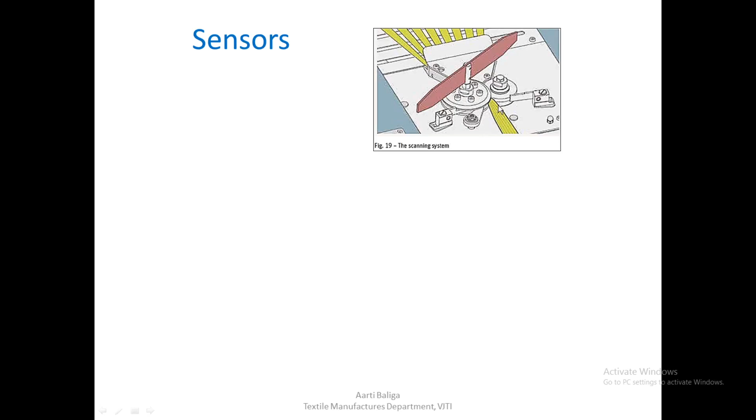So let us first see what kind of sensors are available to measure the thickness of the sliver, whether it is at an input level or at the output level. What you see here in the sketch is the tongue and groove type, the mechanical type of sensor scanning system. So we shall see what kind of sensors are available.

The sensors must be strong and the sensing capacity must not change with changes in temperature and humidity. So any kind of atmospheric changes, whether temperature or humidity, should not affect the sensing capacity of any sensors that we may choose to install on our draw frame.

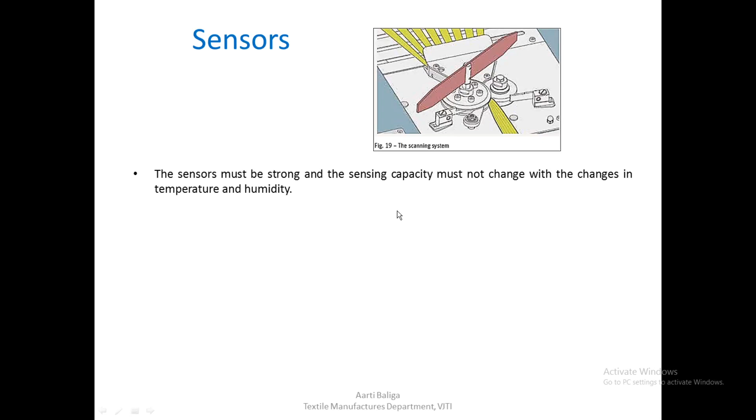Care must be taken so that fiber fly and dust do not affect the sensing capability of sensors. We know that a lot of fly and dust is generated on a draw frame, and if by chance some of it gets deposited on the sensor, the sensor should be robust enough to handle the accumulation of fly and dust, and it should not change the sensing capability too much. Therefore, performance, reliability, and long-term stability of the sensor is very important.

The detection is carried out mechanically by the up and down movement of a grooved roller. This movement is measured, and that is converted into an electrical signal, which will tell us the thickness of the sliver.

There is another way of measuring this thickness, and that is by capacitive sensors. Here the change in capacitance is actually an indicator of the mass variation in a sliver.

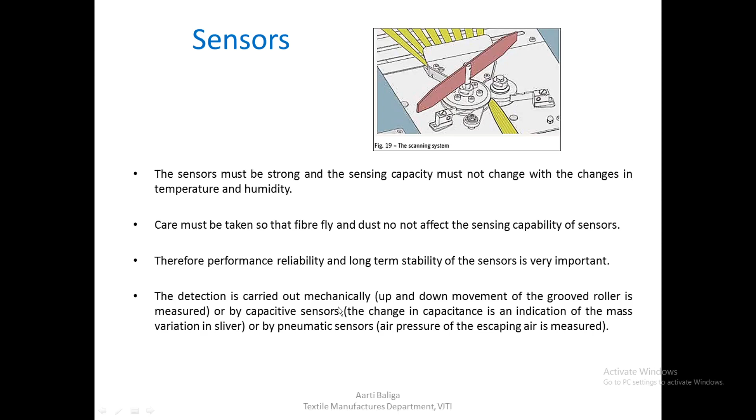And there is a third type of sensor, that is a pneumatic sensor, which depends on air pressure. When the air escapes the material, when the material is compressed, the escaping air variation in force is measured, and that is converted into an electrical signal to tell us the thickness of the material.

So whatever the type of sensor we may choose to have, let us see the location of the sensor on a draw frame. In case of an open loop auto leveler, which we have seen earlier, that is able to correct short and medium term variation. So in an open loop auto leveler, the sensor is always going to be before the process.

That means it is going to be before the drafting system. So in this diagram, we see these are the input slivers that are there. This is the auto leveling principle of an RSB D40, which is a draw frame by Rieter. Looking at this, we see there is an input of 6 slivers that is shown here, and number one marked here is the scanning discs, which are going to do the sensing or measuring of the input material.

Then 2 is the digital signal processor. Whatever signal is generated by this scanning disc in terms of mechanical movement is converted into electrical signal by this digital signal processor, and then it is passed on to one AC servo drive, which handles the speed, or rather gives the command to the drafting system. Specifically, it is shown here as number 4, which is the middle roller of a 4-over-3 drafting arrangement. 5 here is the main motor, and 6 here is the Rieter quality monitor, RQM, which is marked here, which we will probably see in the next lecture.

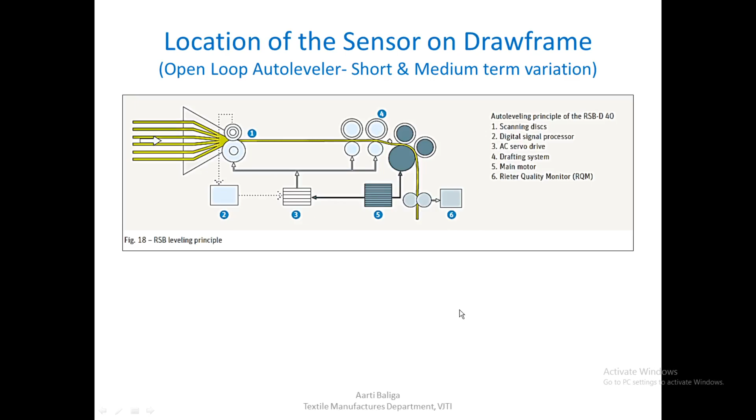So the scanning disc 1 measures the mass deviation of the infeed sliver, and the signal is forwarded to the bottom middle roller of the drafting system, which is marked 4. This bottom roller gets the signal exactly when the scanned piece of faulty sliver arrives at the drafting point in the main zone.

Till the time that material is still traveling towards the middle pair of rollers, the signal is stored in a storage device, and then as soon as it's the right time, when the material just reaches this particular roller, the signal changes the speed of the middle roller to adjust the draft in the direction that the scanning roller has measured.

So it can either work in the way of increasing the draft or decreasing the draft, depending on what kind of material it has measured.

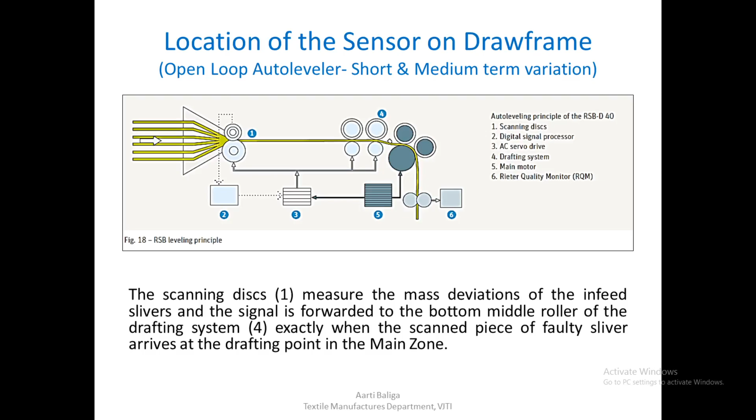So now after understanding the location of the sensor on draw frame, let us see the scanning roller a little bit in more detail. The mechanical type comes in two types again: smooth sensing roller and grooved sensing roller.

This one doesn't have an edge on both sides, whereas this roller can go into the particular slot of the other roller. What you see here is the sliver in between the two rollers. If there is a thick place, this is spring loaded - one of the rollers is spring loaded, so it will be pushed upwards if there is a thick sliver coming in. If it is thin, it will be pushed downwards. This mechanical movement of the top roller up and down is measured and converted into an electric signal.

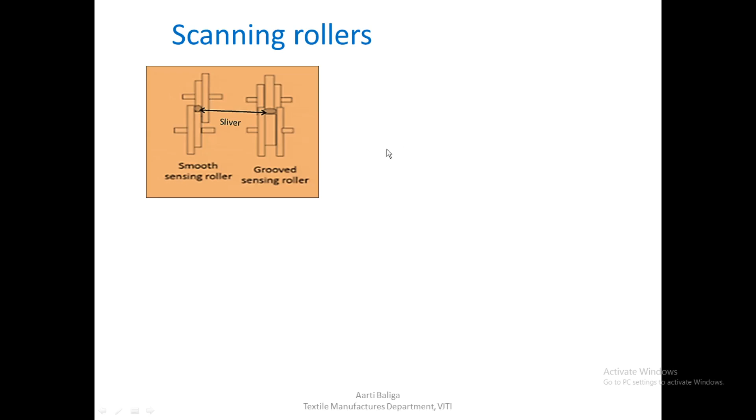The combined thickness of the infeed sliver is continuously measured by a pair of scanning rollers, and they look like this on Rieter, and on Trutzschler it looks like this. You can see the groove roller, and this is known as a tongue and groove roller. Here, somewhere in this width, the sliver will be passing.

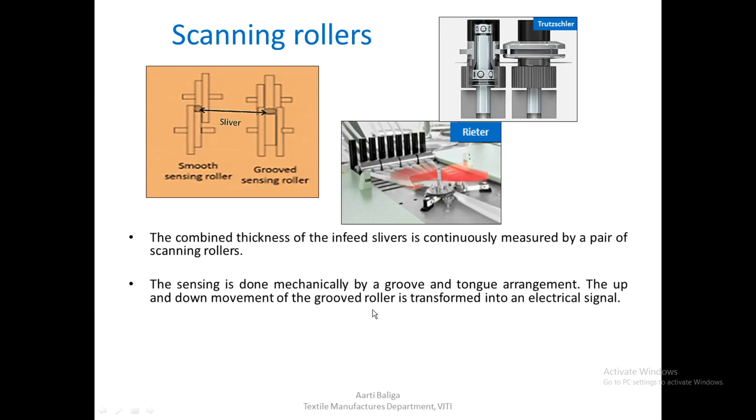The sensing is done mechanically by a groove and tongue arrangement. The up and down movement of the groove roller is transformed into an electrical signal. The width has to be adjusted depending on the bulk of the fed slivers. It ranges from 3 to 10 mm.

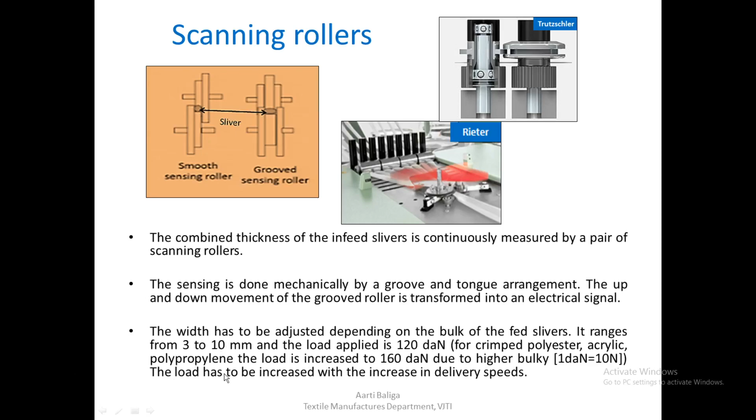As we saw, we need to apply a load to keep the rollers in contact with each other. So the load applied is around 120 daN for crimped polyester, acrylic, polypropylene, and the load is 160 due to the higher bulky material that we see. The load has to be increased with the increase in delivery speeds.

Location of the sensor on the draw frame for closed loop auto leveler, medium and long term variation. Suppose instead of an open loop auto leveler, I prefer to use a closed loop auto leveler. This is not seen on modern draw frames now, but if we were to apply a closed loop auto leveler, we would be having that on the delivery side of the machine, and we are going to see exactly where it would be installed.

It would be installed near the trumpet, after the front roller, before the calendar roller, and this would be the measuring point or the sensing point. As you can see, this is the passage of material - material comes out of the front roller, goes into the measuring trumpet, then into the calendar roller. So the measuring trumpet is the one which is going to sense the material.

Now the controlling point is the middle roller as before. After it senses, it will send the signal to the middle roller for any kind of adjustment and changes. So adjustment takes place by adjusting the draft in the main drafting zone.

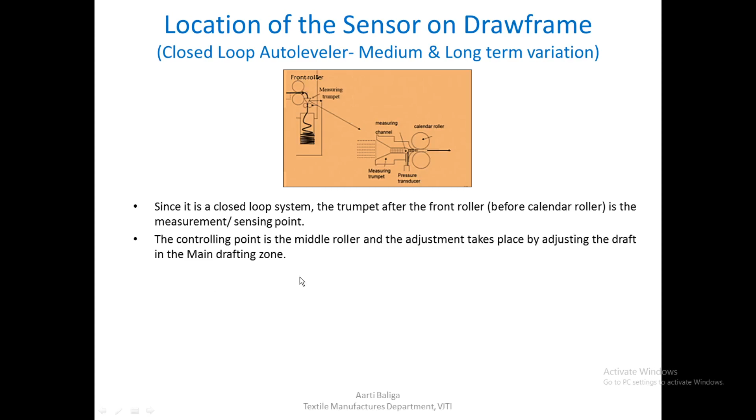Since the measurement has to be carried out at a very high speed, because it's the delivery side that we're talking about, measurement will be carried out at a very high speed. So no mechanical measuring system is used. A pressure transducer at the trumpet records the variation.

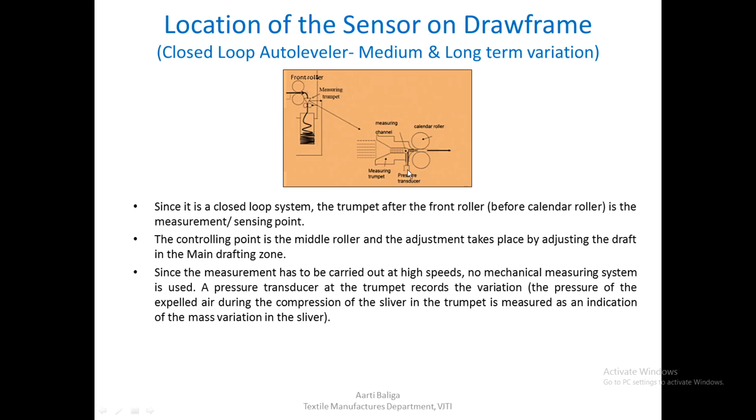The pressure of the expelled air, as I said earlier, because of the compression of the sliver at the trumpet, that particular air is measured, and this is an indication of the mass variation in the sliver. It is recorded by this pressure transducer and it is converted into appropriate signals for the middle roller to change its speed.

The device is simple in construction and needs minimum maintenance since there are no moving parts, but the measurement is affected by the variation in fiber fineness.

Such measurements, which depend on air passing through a tuft of fibers, will always affect the amount of air passing through, and it will always depend on the fiber fineness. The amount of air going through this tuft of fibers will change if the fiber is finer, or if the fiber is coarser. So depending on the fineness of the fiber, this will change. Although this device is simple in construction, this variation will affect the measurement - it will always depend on the fiber fineness.

Since the amount of air that escapes through the fiber mass changes with the changes in fiber fineness, we also see this in fineness measuring instruments, where various fiber fineness measurements again use air - the principle of airflow is used to measure fiber fineness. The same thing will happen here: the moment the fiber fineness changes, you will have a variation in the amount of air passing through, and you will have a variation.

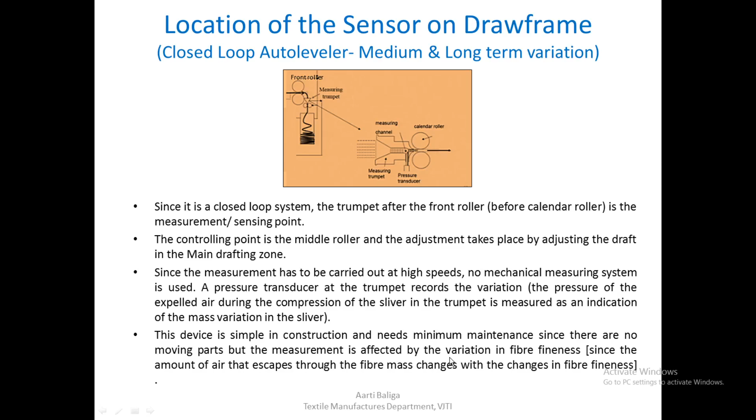So we come to a main topic, an important one, that is correction length. Let us see what is correction length.

As soon as the sensing device detects a deviation in mass, a signal is sent to the regulating device. But the correction happens gradually due to the inherent inertia of the system. So between the measurement and the regulating, there is some time delay. This happens mainly because it takes time for the system to measure and then go and regulate, and by the time it regulates, some time elapses before the sliver is corrected.

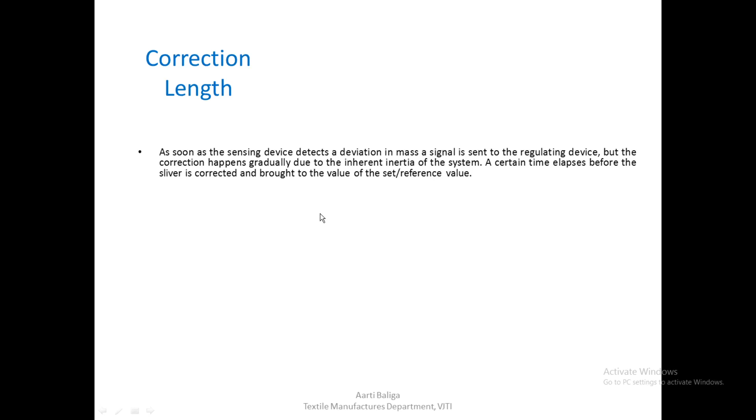During that particular time, some amount of material would have passed through or delivered, which would be the faulty sliver not corrected by the auto leveler. So during this elapsed time, known as the correction time, the faulty sliver is still being delivered, although the deviation is steadily being reduced. Deviation might get reduced slowly over time, but there will definitely be some amount of faulty sliver delivered.

So the faulty sliver that is partially corrected due to the above elapsed time is known as the correction length. Correction length therefore equals correction time—the time passed between measurement and regulation—multiplied by the speed of material flow, which gives the exact correction length, that is the faulty material that has gone ahead.

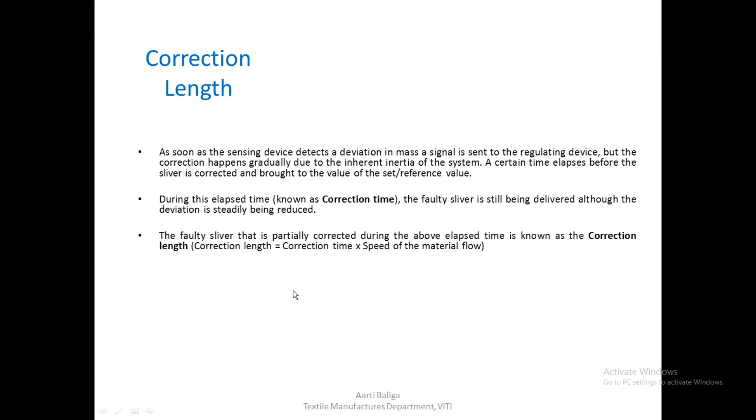So in the diagram we can see it like this. In case of an open loop auto leveler, the correction length is due only to the reaction time that the system will take, and this is the sliver thickness. So some amount of faulty sliver, as we said, will be seen in the output material.

In the open loop system, the correction length is only due to inertia, that is the reaction time in the system stated above. But in the closed loop auto leveler, there is one more factor involved, which is known as dead time.

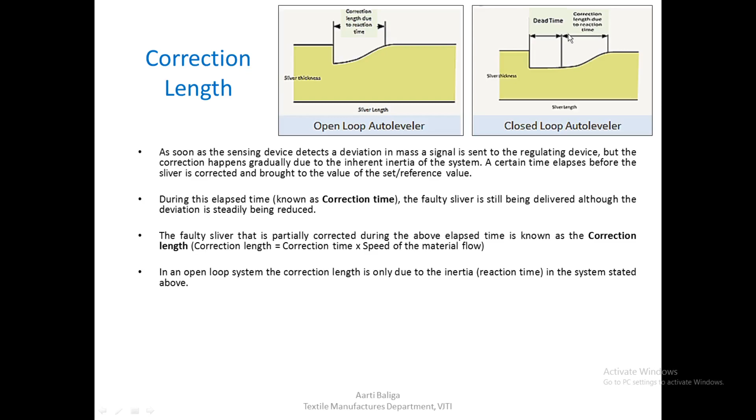So correction length due to inertia in the system, or the reaction time, is already there, but there is one more factor which is dead time, which will increase the total correction length in case of a closed loop auto leveler. So in a closed loop auto leveler, the correction length increases due to the additional dead time required for correction due to the system itself.

Now, since we have understood both the open loop and closed loop systems in our earlier lecture, we know that in a closed loop system the measurement is on the delivery side. So by the time the material has reached from the process to the measurement point, during that time itself we have allowed some amount of faulty sliver to pass through.

And after the measurement is done, the system sends a signal later on, and that is why, over and above the reaction time required, we have also wasted some time in the measuring system itself—because before measuring, some time has already gone and more faulty material is already delivered. So we have to add both: one is the reaction delay in the system, plus there will be some dead time already gone or wasted because of the system itself.

And therefore we can see that the time lost because the measurement is done at the delivery point, and by the time the signal is sent to the regulating system, some faulty material would already have been delivered—this would be the dead time, the extra time taken by the closed loop auto leveler.

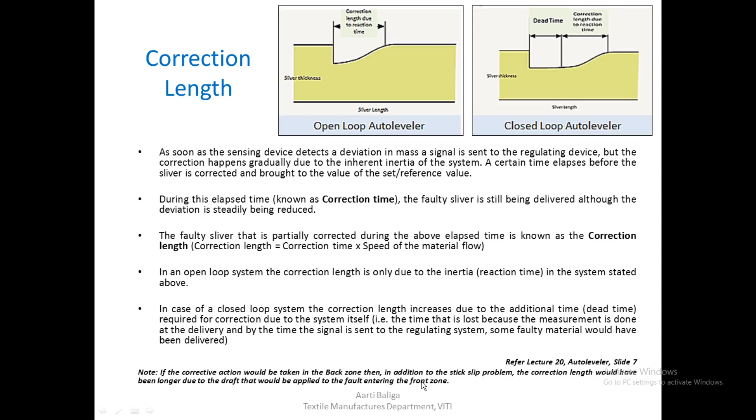This is another point which proves that we have taken the right decision by having the auto leveling system in the front zone, and that too on the bottom middle roller of the system.

So we come to the significance of correction length. Auto levelers are only suitable when the reaction time is shorter than the length of the variation to be corrected. This means that if the reaction time is long, then by the time the system reacts, the small fault or short fault that we have would have gone out of the system, and the auto leveler will not be able to do anything much.

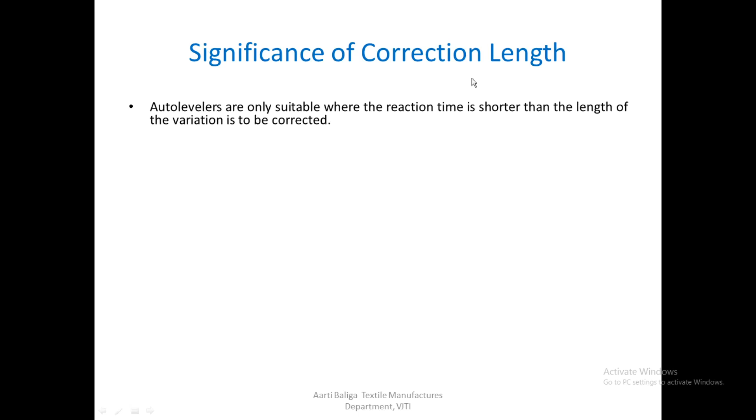That means the reaction is fast enough to take care of the shortest length of variation that we need to correct. So the correction length, as we have seen in the earlier slide, is more for closed loop and it is less for open loop systems.

Correction length is usually used to describe the efficiency of the auto leveler. So if I want to decide which auto leveler is better, I would normally go and look at the correction length that is there for that particular auto leveler to make the right choice.

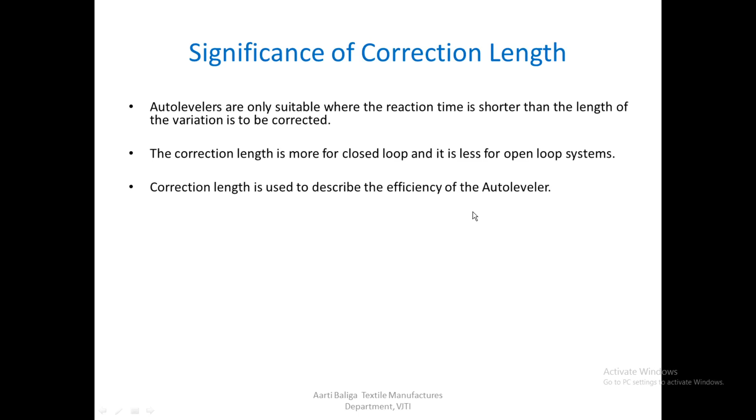An auto leveler is able to reduce count variations, reduce short-term irregularity, improve CV of the yarn strength, reduce yarn imperfections—that is thick, thin, neps and Uster and Classimat faults—and also improves the efficiency of the speed frame, that is the downstream processes after draw frame.

Because if the evenness of the delivered sliver is good, the efficiency of the speed frame as well as ring frame will improve. And even in the winding machine, which comes next after ring frame, I would find fewer faults, and that's why fewer cuts over there to correct those faults.

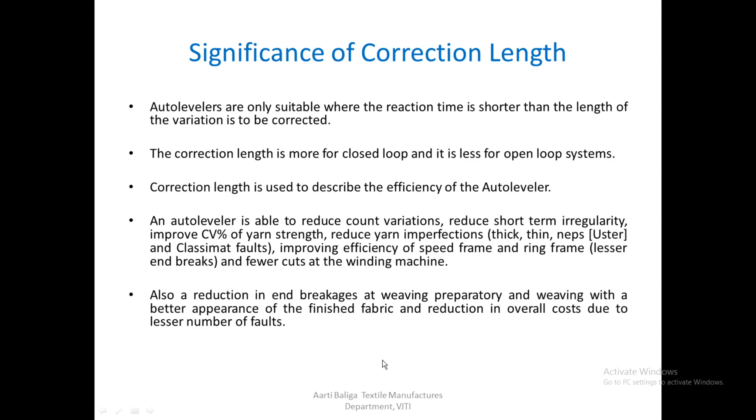Also a reduction in the end breakages at weaving preparatory and weaving, with a better appearance of the finished fabric, and a reduction in overall cost due to lesser number of faults. So whatever downstream processes are there, right up to weaving and finishing, all the processes will benefit by the use of an auto leveler, and if possible, a very low correction length.

So factors influencing correction length. We should see what are the factors that would affect them. If we can help correct or have control over these factors, maybe we can reduce the correction length. So what are the factors?

First one is the distance between sensing and regulating point. So if the sensing point and regulating point are too far away, then the correction length might get affected and it might get increased.

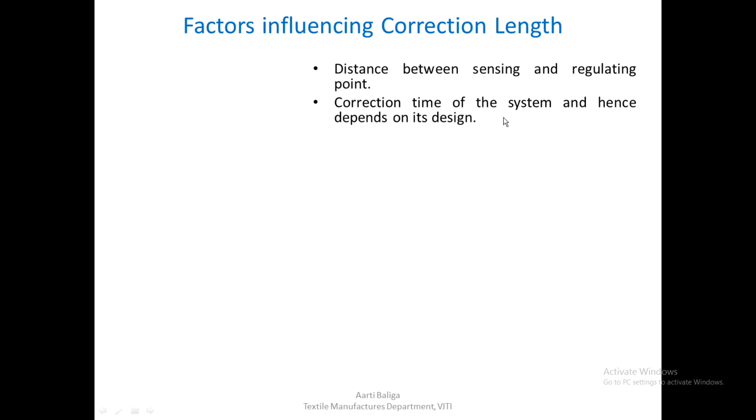Correction time of the system also depends on its design. If the system is taking a long time to react, then your correction length would increase, and also it will depend on the design—where you have placed the scanning or sensing system, where the regulation is going to take place, etc. So the design of the system would also influence correction length.

Also, the draft in the zone would affect correction length. If the draft in that particular zone is high, then your correction length might increase.

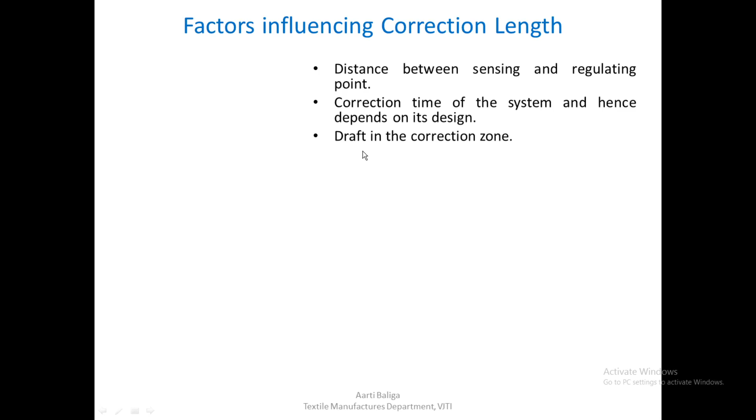So extent of mass variation from the set value—if the set value is say X and your mass variation is too high, then by the time that very high or very thick place comes back to normal would take a longer time, and so your correction time might increase. So extent of mass variation from the set value will affect your correction length.

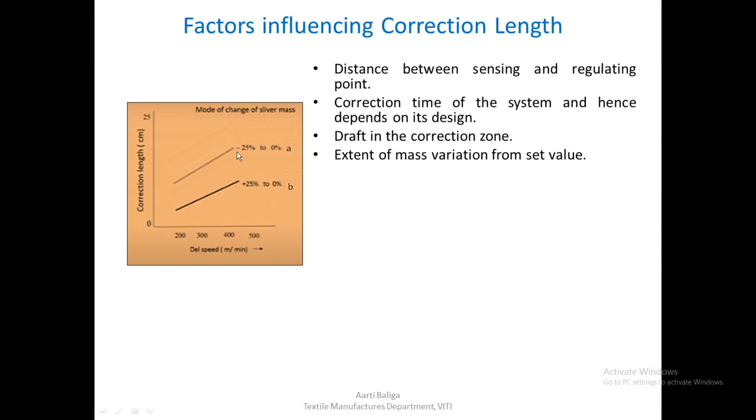Also, the mode of change of sliver mass will affect the correction length. This graph is trying to tell us whether the correction is happening from a thin place, say -25, to 0—that is, from thin material to normal material—or if it is from a thick material to a normal material.

It is seen from this graph that the correction length has increased if the material has to go from a thin place to be corrected to normal—the correction length would be higher than in the case where the material has to come down from a thick place to normal. So even this will affect your correction length.

So delivery speed—correction length increases with the increase in delivery speed. This is the first thing that we see. As the delivery speed increases, the correction length will increase.

This is due to the increase in correction time and more delivery in a given response time. If the delivery speed is high, it means the correction length has increased due to the inherent draft in the system, and also the sense and direction of change in the draft required.

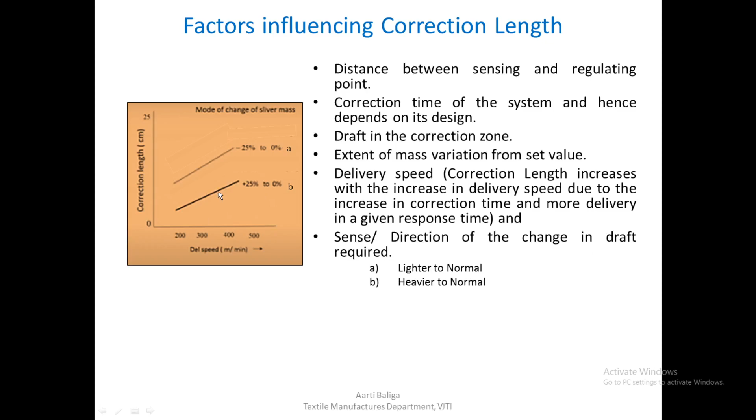As we already saw, if it is going from lighter to normal, the correction length will be higher compared to material being corrected by changing draft from heavier material to normal material. So all these factors will influence the correction length.

The correction length for an open loop system has been brought down to 3 centimeters, and 5 to 10 meters for a closed loop system. So open loop systems can correct very short irregularities, even up to 3 centimeters, while a closed loop system can only correct in meters, which is 5 to 10 meters.

Repeating the earlier point with figures: if the correction would have been done in the break draft zone, the correction length would have been 10 to 20 meters. If the same correction were done in the break draft zone, the front roller draft would also be applicable to the fault, giving a correction length more than 5 to 10 meters, almost 10 to 20 meters.

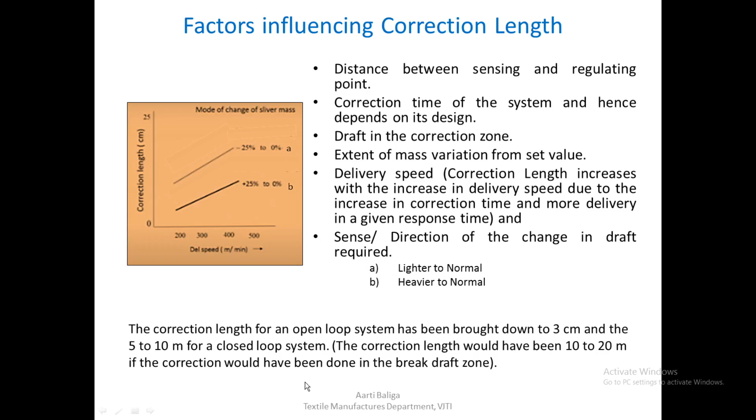So again, this reinforces our idea that we should not have an auto leveling system in the break draft zone or the back zone. It should always be in the main draft zone, and the correction should happen on the bottom middle roller of the drafting system.

Now we come to the considerations while working with an auto leveler. We should be aware of certain factors that might affect the measurements and sensors due to various environmental conditions, the condition of the material, and so on. If we are aware of this, we would be able to judge the readings given by the auto leveler and take appropriate action.

Moisture content in the sliver being processed may lead to incorrect measurements. A sensor based on capacitors will always have a change in electrical signals or capacitance because of the moisture content in the sliver. If moisture content is high the measurements will be different, and if low it will also be different. This has nothing to do with the mass of the sliver, but the readings might change just because the moisture content has changed. We should understand this limitation of capacitor-based sensors.

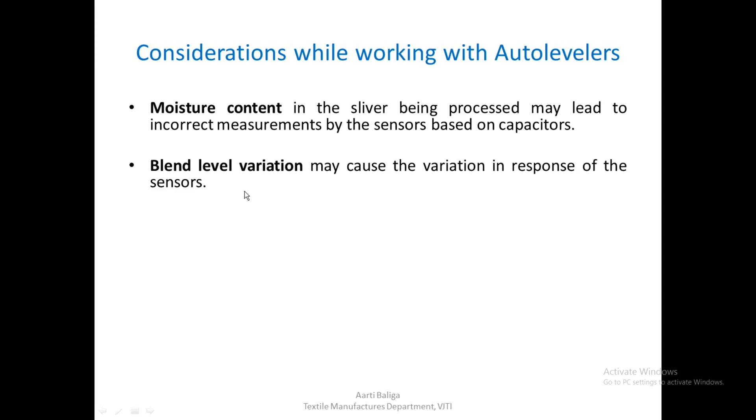Also, blend level variation may cause variation in the response of this kind of sensor. In blend level variations, suppose there are two fibers, polyester and cotton, being blended together. If there is variation in the blending level, such sensors will sense them differently depending on the proportion of fibers in a particular measurement area, and you might find a variation.

Also, variation in fiber fineness and density leads to variation in the response of a pneumatic type of sensor. As we've seen, pneumatic sensing is based on airflow, and fiber fineness affects the amount of air flowing through the trumpet or sensor, which affects the readings. Similarly, the density of the fiber passing through will also show variation in the readings, not because of the mass, but because of density and fiber fineness, or the kind of variation in the fibrous material passing through.

These limitations should always be kept in mind, and hence maintaining a homogeneous mixture in the blow room is also very important. To reduce this kind of variation creeping into our measurements, we should ensure the blow room does a very good job of homogeneous mixing, which becomes one of the important factors when working with auto levelers.

The auto leveler's response also changes with the level of draft applied. So in a department having many draw frames, we should ensure the draft values on each and every draw frame are the same. Otherwise the readings and measurements the auto leveler gives, and the necessary changes it makes, would vary from draw frame to draw frame in the same department. If we don't want that kind of variation or non-uniformity, we should ensure the draft levels on each and every draw frame are uniform.